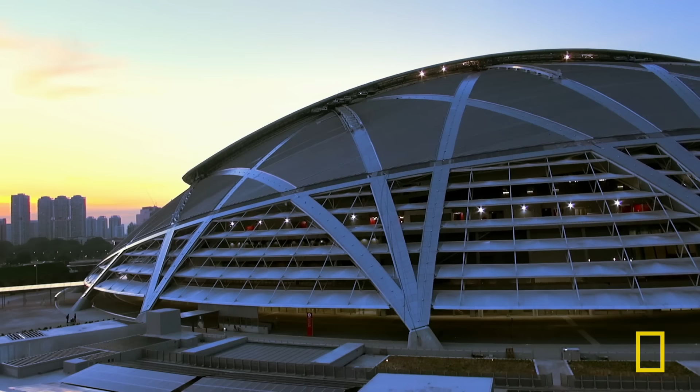Like no other, this enormous state-of-the-art building dominates the entire city that surrounds it. The Singapore National Stadium is a truly epic structure. It's simply, undeniably unique. You have this beacon of light coming off the top of it. The multi-award-winning sports arena is a dazzling symbol of Singapore's national pride. But more than that, it's architecture on a scale never previously achieved.

It's the largest free-spanning dome in the world. How on earth do you build a dome this big? It's a real marvel of structural engineering. When it opened in June 2014, the spectacular ceremony marked the end of a torturous battle against the laws of nature.

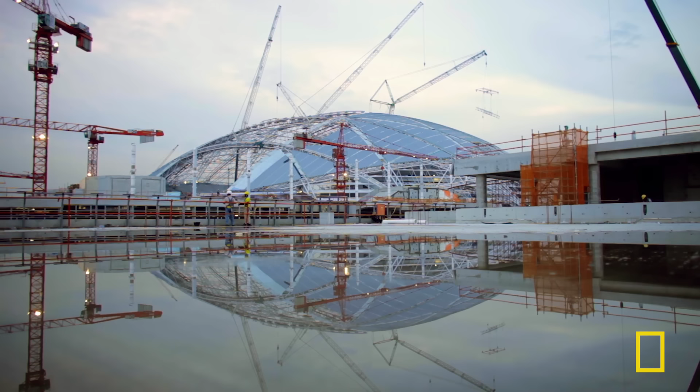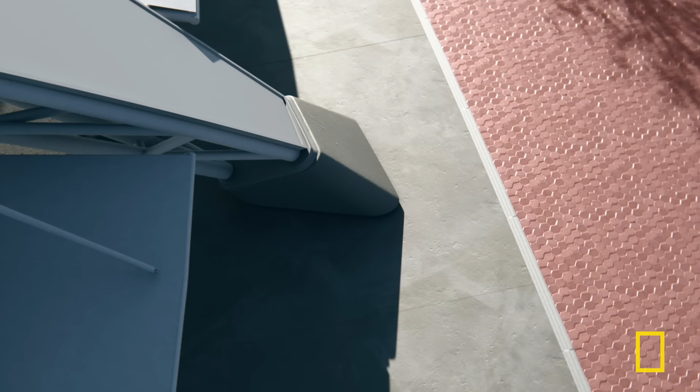Physics, as well as the climate, and even the land the stadium is built on, presented a deluge of horrendous hurdles that came close to defeating designers. Obviously, it's a major project with huge challenges along the way to making it and realising it. The only way to find out how architects and engineers won the battle to turn the stadium into a successful reality is to take it apart and reveal the innovations hidden within it.

The futuristic Singapore National Stadium is the centerpiece of a giant $1.3 billion sports hub. Dreamed up at the start of the millennium, the intention was to give the city-state a glossy new forward-looking image, with a stadium that could host prestigious international events.

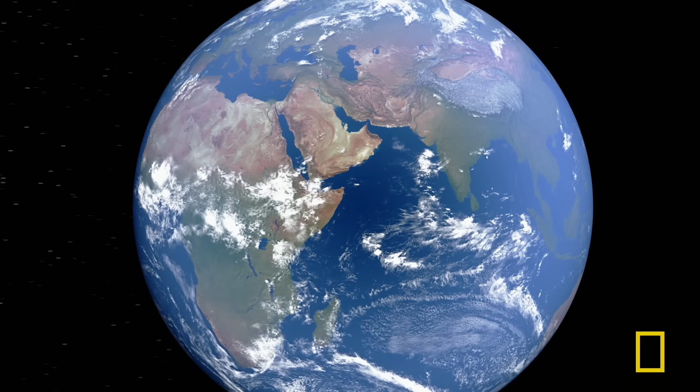Back in the year 2000, Singapore was really looking at transforming itself. It is a little red dot in the context of neighboring countries and this part of the world. We may be small, but the dreams and aspirations of Singapore are actually very bold, very big. Today, the stadium stands as a testament to those grand aspirations. The National Stadium is the largest free-spanning dome in the world, spanning over 1,000 feet.

The range of engineering disciplines that we were controlling was beyond anything I've done before in my career. Designing a venue that delivers a great experience to tens of thousands of people all at once is quite different to any other engineering challenge. And for architects, a stadium can be the most creative project of all.

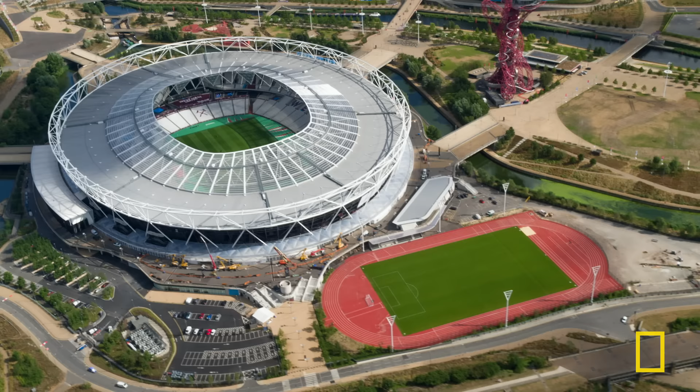This is incredibly hard to do. It requires a vast investment in technology to engineer that. And so you have to have the right kind of geological conditions and the right kind of infrastructure systems in place to support the building, both during its construction and during its lifetime.

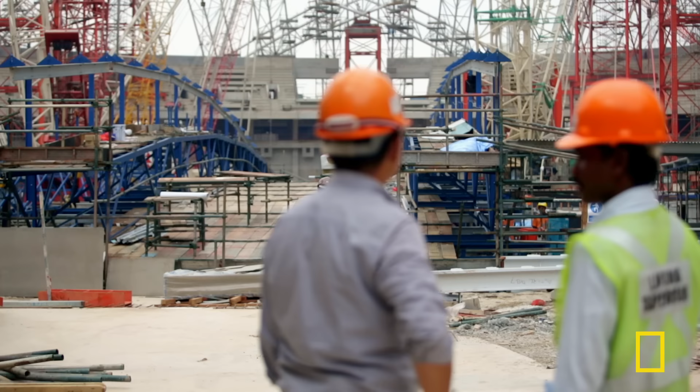All of these buildings are one-offs. You're not doing it as number 7 in a series of 10. These are each unique buildings with their own constraints and their own set of reasons for coming up with various aspects of the designs. The problems to overcome can be anything from crowd transportation to the sourcing of building materials. For the Singapore National Stadium, there is one issue that will never go away.

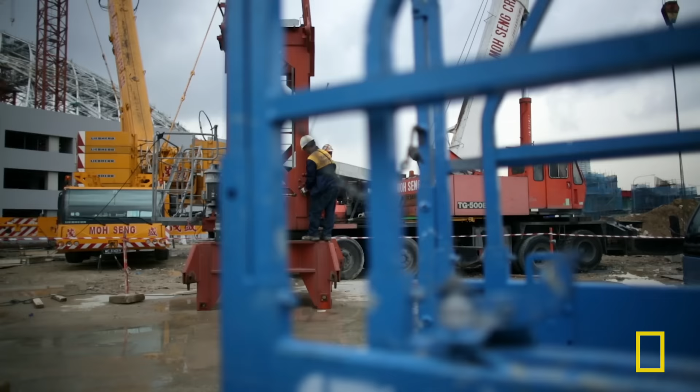We are located in a tropical zone where it doesn't just rain, it pours cats and dogs, right? In the 1970s, the first national stadium was built on the same site. But it was open air and completely useless against the elements. Right from the start, the brief for the new stadium insisted on a weatherproof roof. The architects could only come up with one solution.

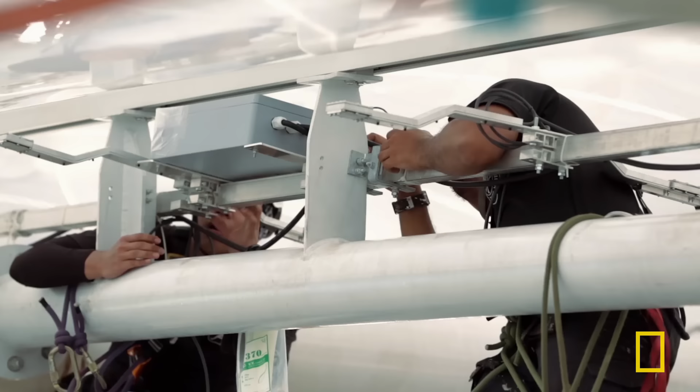It was radical and would be a huge and very public gamble because it had never been attempted on this scale until now. There's a huge amount of pressure, and you're always feeling that if it didn't work this time, then you didn't have an alternative. To build an actual structurally sound, solid roof over a stadium is a feat of engineering of some distinction. For starters, the area of a stadium roof is vast. And that means weight, lots of it.

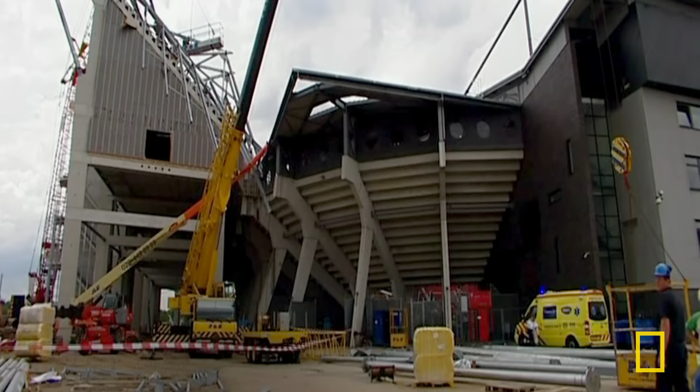Several stadium roofs have collapsed. You have to think about the obstacles you face whenever you enclose a stadium of any kind, which is how do you hold the roof up? And in most conventional stadiums, that was done with columns. Columns are very effective for supporting flat roofs. But any column system inside a stadium has a fundamental disadvantage.

In a large sporting arena, the starting point for the designer is the field of view of the spectator. They want to be able to see what's going on. You don't want a column interfering with the view of the fans sitting behind it of the action on the pitch. So how do you deal with that?

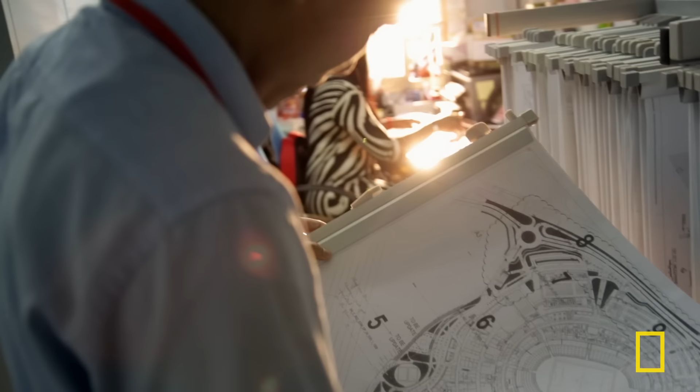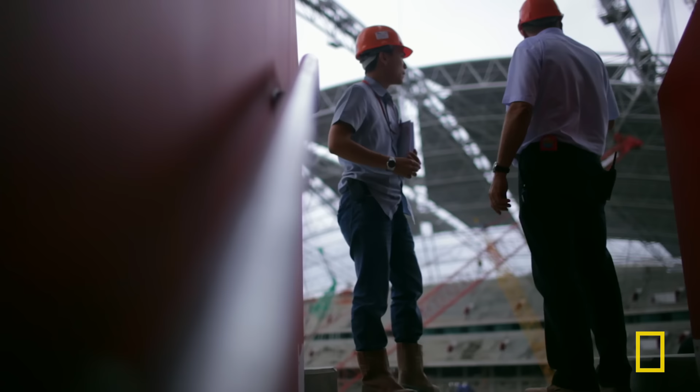For the new Singapore National Stadium, any design with columns is ruled out. But a roof is still a requirement, and it must be supported somehow. Architects delve into history for inspiration.

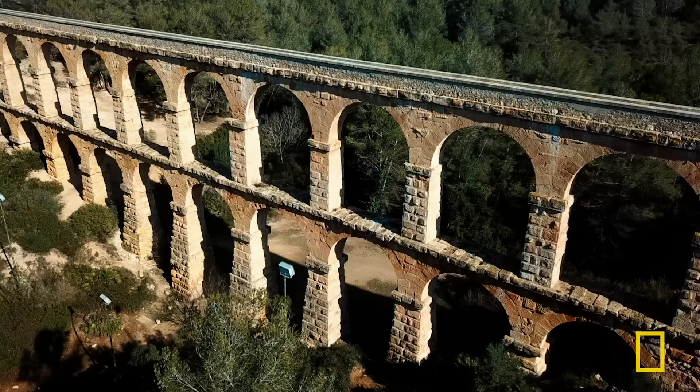Going back to sort of Roman bridges and the like, the arch has always been a very natural form for resisting uniform gravity loads. That's why they work well for bridges and even the natural arches that would form in rock. If you think about the arch, you've got this curved structure, and when you put a uniform weight on top of that arch, the arch basically channels all of that load into the bottom of the arch, but it keeps the entire structure in compression. So what that means is it's being squashed together.

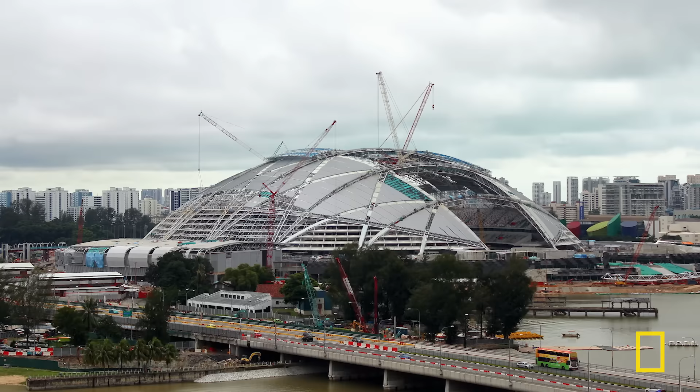You take an arch and just keep on rotating it, rotating it, rotating it, you get a dome. Not only is that efficient for resisting a uniform downward load, because it's a three-dimensional system, it actually has quite a lot of resistance to buckling out of shape. The architects choose a dome for the roof, but they go a step further and plan the entire structure to be contained in the dome.

As is the case with any building, scale matters. So sometimes when you do something that we know well, but you just do it a lot larger, the impact really is tremendous. But what about the weight problem that a roof of this scale inevitably poses? The stadium's first secret lies underneath its outer shell. There are no supporting walls. The whole building is basically a roof, a lightweight dome formed by a number of gigantic metal arches.

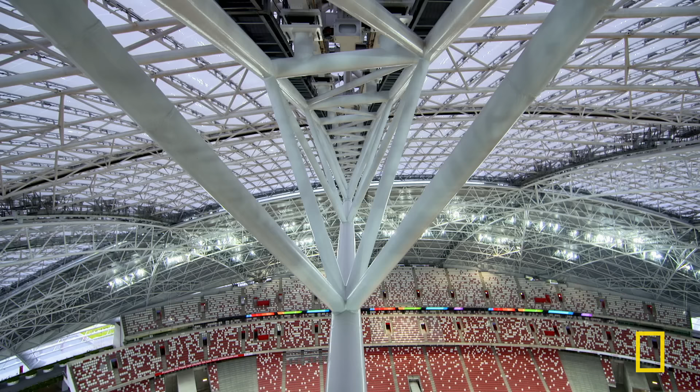6 steel trusses span from side to side, and at 90 degrees to them, there are giant transverse trusses. Together, they hold up the whole roof. Trusses with lattice structures are structural engineers' favorites because they've got triangles in them, and triangles are really, really stable shapes. They don't deform. So if you imagine that you had a rectangle shape, and if you put kind of funny forces onto it, it can deform into a diamond, but triangles just don't do that.

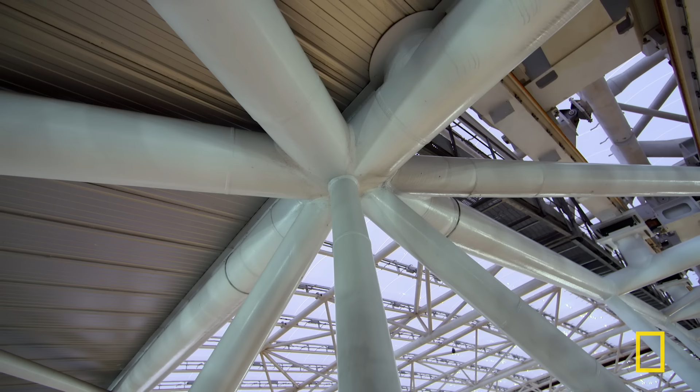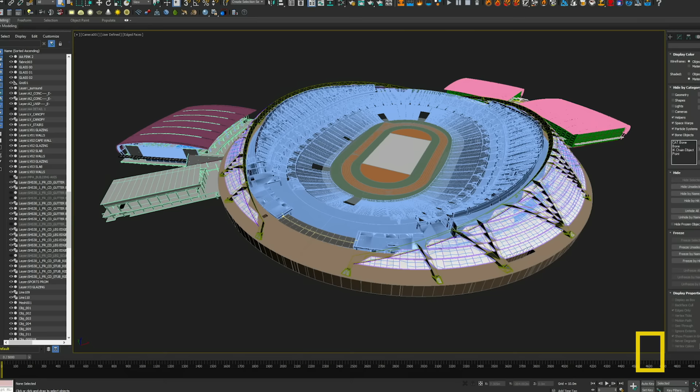There are over 11,000 tons of steel in this monumental structure. But in 2008, when the design team were still drawing up plans, the global financial crash takes its toll, and steel prices rise all too aptly, right through the roof. When we initially did the design of this, we had almost double the amount of steel that was in the roof. And then as steel prices escalated, there was a real drive to say, okay, how can we drive efficiency into this? To stop the project going way over budget, the team urgently needs a revised design.

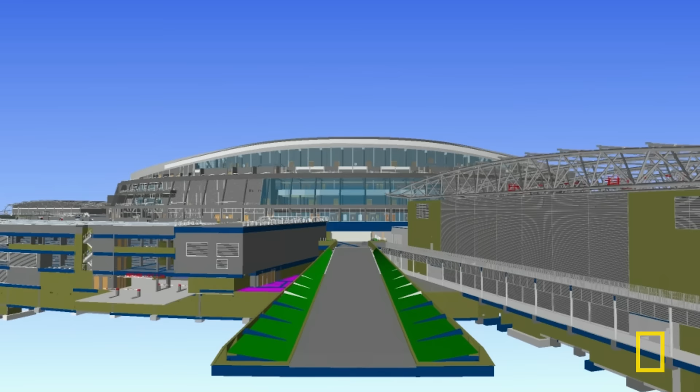Our design mantra was to reduce weight everywhere in the structure of that dome, so we got the best, most efficient shell structure. Everything had to be optimized to minimum weight to make that a very efficient dome. They create an innovative computer program that can work out the minimum amount of steel that would still meet the structural requirement. We developed a very bespoke piece of software to achieve optimization of every element within that roof structure, whether that was the thickness of the steel or the diameter of the tube. It was all optimized to make it the lightest steel structure possible.

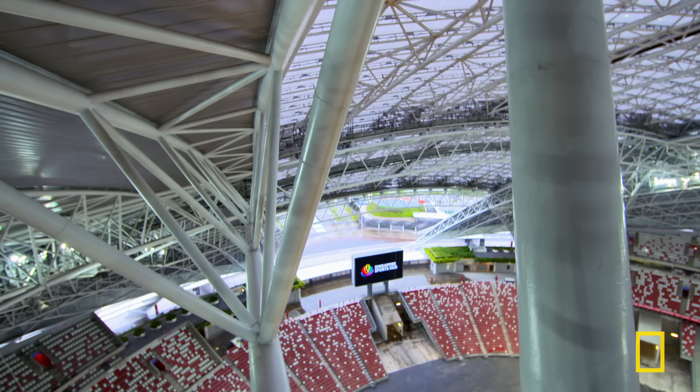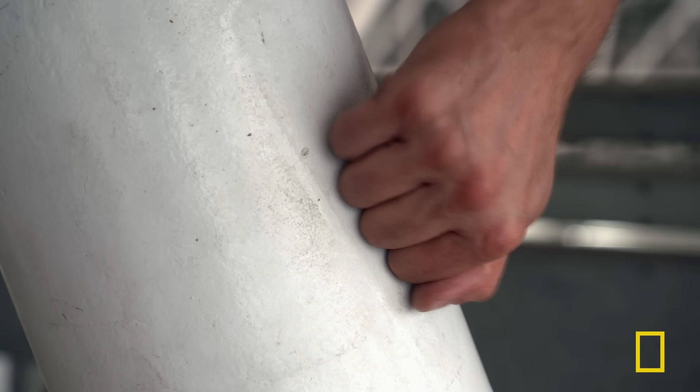20, 30 years ago, you just couldn't do that. It would take you years to do the sort of design that we've done here in a matter of months. The result is a world record-breaking dome that is so large the Sydney Opera House would fit inside it. All of the sections are hollow, so they're all hollow tubular sections. You make them as thin and as light as you can. You're up here and you're looking at it at various angles, and everything just looks right and it looks in balance, because everything is here for a reason.

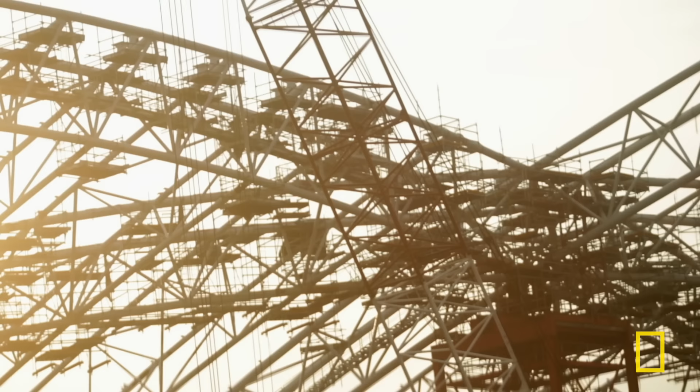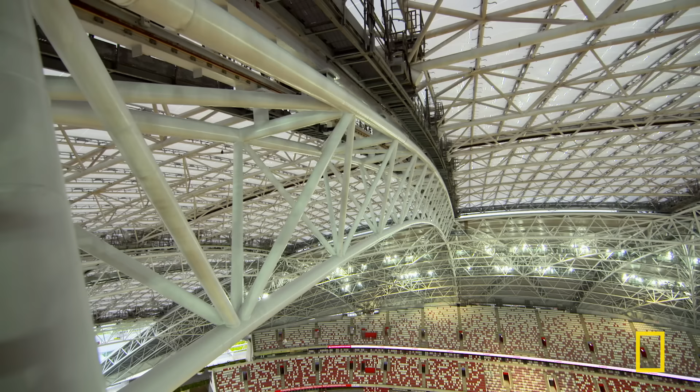Reducing the amount of steel cleverly saved the budget going bust before construction had even started. If you took all of the steel in the roof and you melted it down and laid it down on the footprint of the building, you'd only have 15 millimeters of steel. The structure that makes it up looks really light and elegant and slender. So I think it's a real marvel of structural engineering. One challenge down, but the roof design is just the start. Making it hold its own weight is one thing. Firmly attaching it to the ground is quite another.

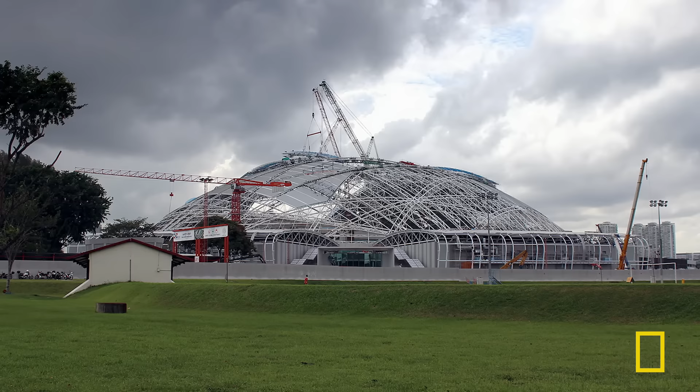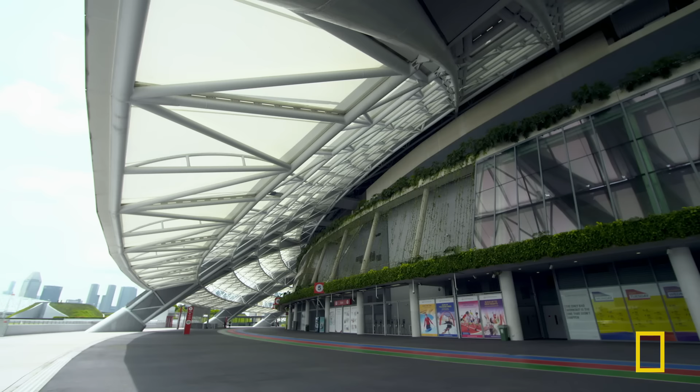When the high-tech Singapore National Stadium was built, the construction team faced a serious problem. The local terrain was completely unsuitable for erecting a large, heavy building. Because it's reclaimed land, directly underneath the grass and the topsoil here, we have a lot of what's called marine clay, and marine clay is about as useful as dark grey toothpaste to build a building on. It really is just muck. If you were coming down onto rock, the force from a dome could go directly into the rock. We don't have that advantage here.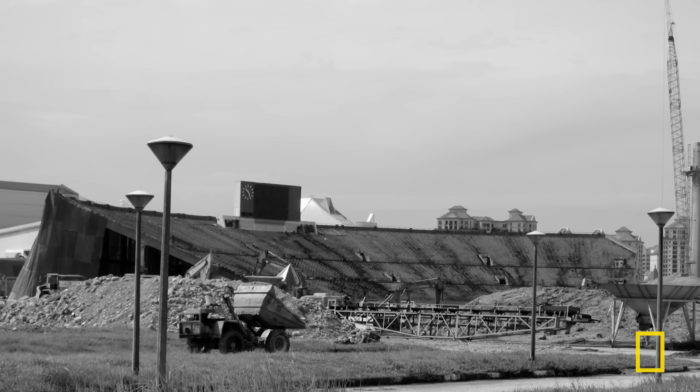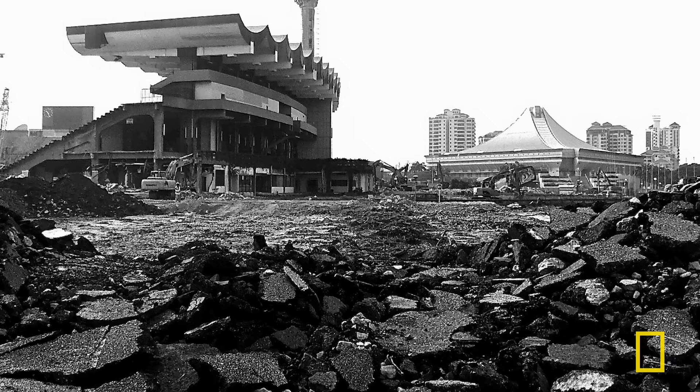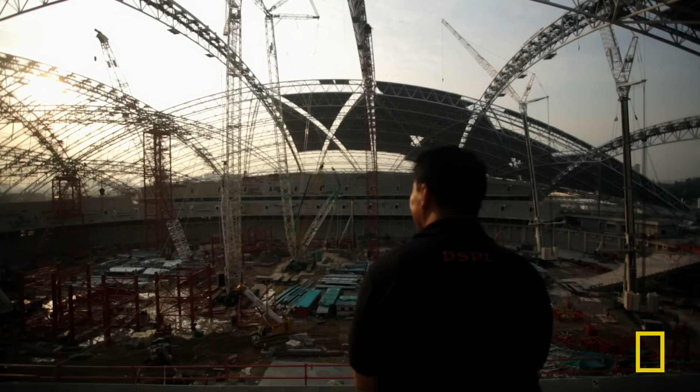The poor ground threatened the whole project, but there was a clever solution right in front of them. We started with the demolition of the old stadium here in late 2010. The old stadium was crushed up. All of the concrete was used as either a base or some parts of the ground forming for landscape. And on top of that debris, a rock-solid base of concrete. The Singapore Stadium is built off what is called a raft foundation. Now that is a large concrete slab over the ground.

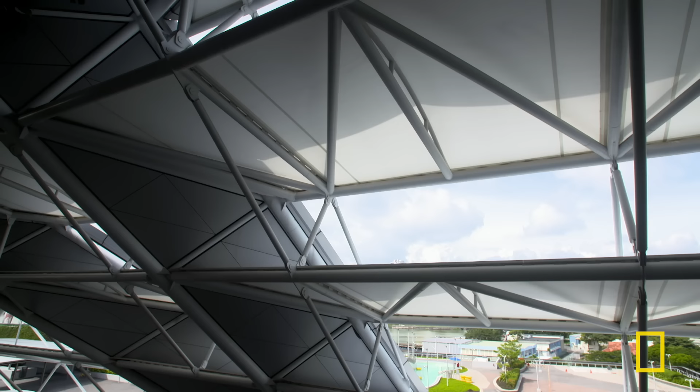Unfortunately, the raft foundation alone is not enough. The dome's weight pushes out as well as down. It would collapse into a giant pancake unless something holds it in. Once again, the engineers look to historic masters for inspiration.

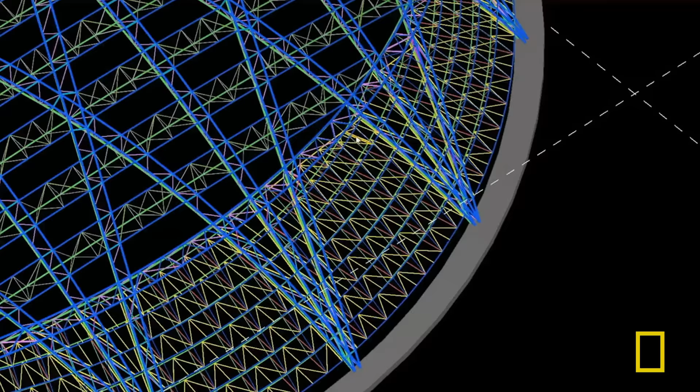In historic domes, like Florence Cathedral or St. Paul's, is a chain, a metal chain. So you put a metal chain around the edges, so where all the weight of the dome comes down and is trying to pull out, it's restrained. Engineers stole that Renaissance concept and came up with what's known as a ring beam. Instead of using a chain above ground, they buried it in the foundations.

In the Singapore Stadium, the dome is restrained at the edge by steelwork that must be completely continuous, as if it were a chain, to stop the dome pushing out. It relies upon being one structure with complete undamaged integrity.

So what I'm standing on the edge of at the moment is the ring beam, and it contains 14 ducts of very high-strength steel cables. And those cables, the amount of force that we put in those, we pre-stress them, is around 4,000 tons. So it's a huge amount of force. The ring beam is like a large, very strong elastic band that's pulling it back in so that all those legs don't spread. Most critical is where the huge trusses meet the ring beam. A single error here, and the trusses would explode out.

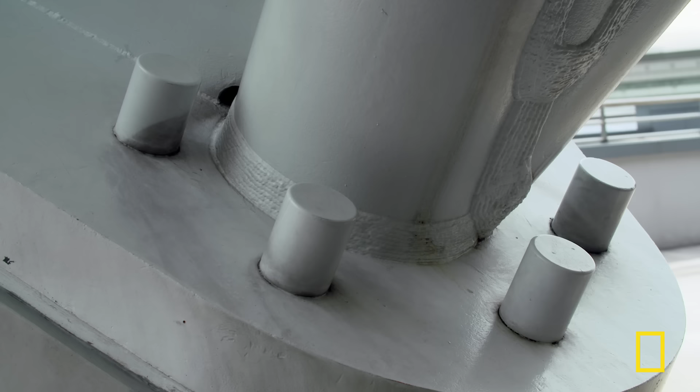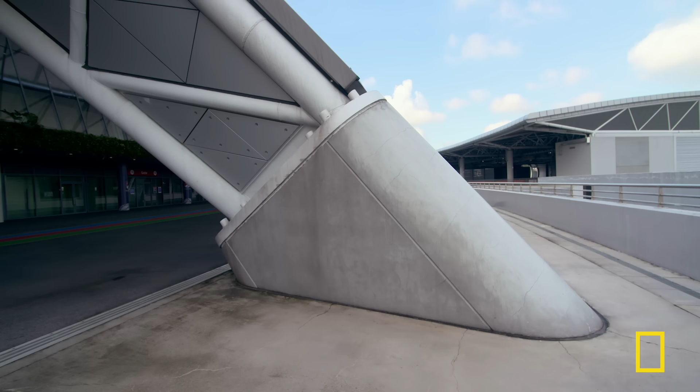So these are some of the most complex and nerve-wracking parts of the project to construct, and we call them the thrust blocks. So the entire roof, which is 9,000 tons of steel and around 15,000 tons total weight, comes down on only 20 of these supports. So you can imagine how hard they're working. The weight of the whole structure is directed down onto these huge thrust blocks. The only way to understand how they're locked onto the ring beam is to look inside one of them.

Hidden within the giant concrete block is the secret. 175 metal rods called shear keys penetrate right into the heart of the ring beam, their length and diameter perfectly calculated to be just enough to completely secure the truss. Bringing this down just to get 175 shear keys to sit inside that reinforced mat was one of the most challenging elements of the whole job. The next aspect of the project is where the real headaches start.

The pitch is made of live grass, which leads to another complex engineering problem. The enormous roof has to open and close. The moving roof did pose challenges for us. Quite commonly they're done on a flatter roof profile, and they're very linear in their opening and closing arrangement. Doing it on a sphere created some real challenges for us. The movable sections each cover 100,000 square feet. And because they're curved, getting them to move at all is a mechanic's nightmare.

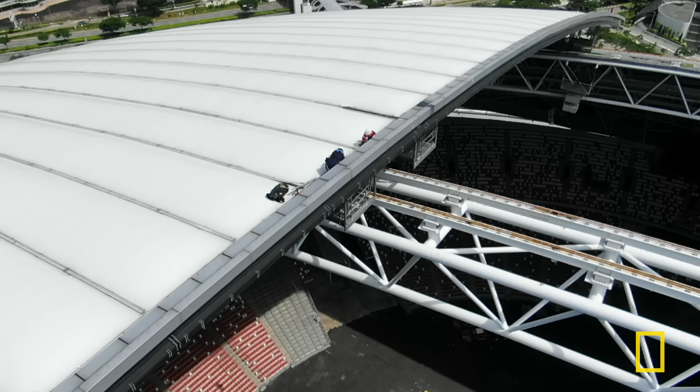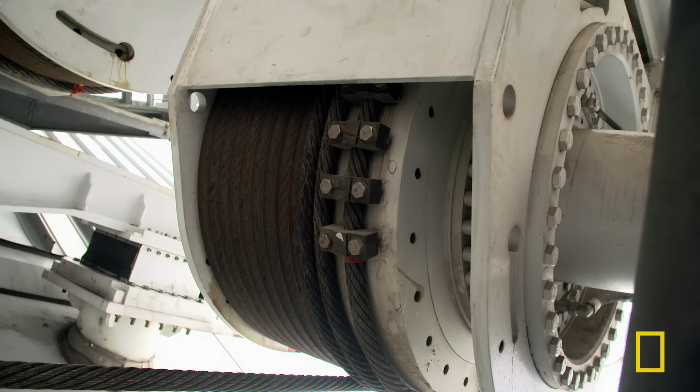The retractable roof is around 1,000 tonnes per leaf. There's 2 leaves that open and close, so the roof had to be very strong and very stable. The design was for the movable leaves to run on rails. But there was a dilemma. Any expansion or contraction of the metal components could make the panels jam. So they couldn't be too rigid.

We worked out very early that we should have a very stiff fixed roof, but then kind of a floppy retractable roof that could kind of bend and move a little bit. The solution that engineers ended up using was an incredibly efficient winch system, with winches mounted on that retractable roof to reduce the amount of cable that was required.

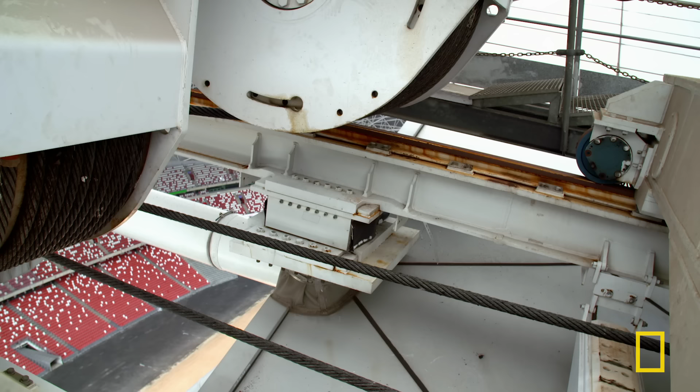When you are winching in, it pulls the roof upwards to close. When we are lowering the roof, the majority of the work is done by sheer gravity. The roof panels are mounted on rails attached to the arch trusses. Powerful winches on the base of each panel heave them up to close the roof, and the cables take the strain when it opens.

But here's where it's really smart. Sensors monitor exactly where the panels are, preventing them from ever skewing more than 1.5 inches. And to reduce friction, the number of wheels in the system is kept to a minimum. If we reduce the number of points that it actually hangs from, or the driving points, then that also reduced the possibility of the whole thing jamming.

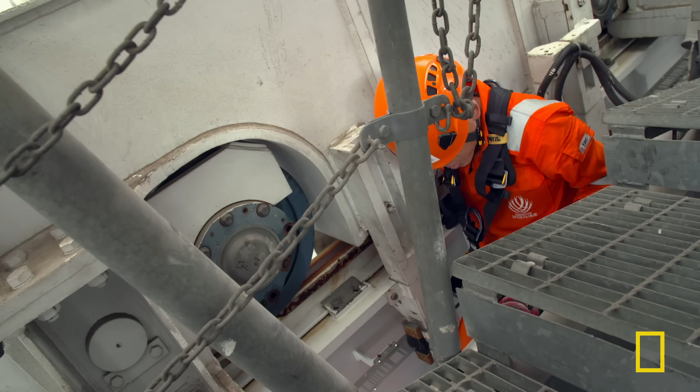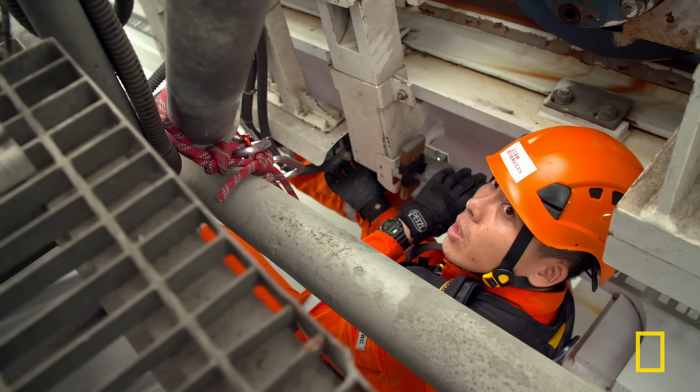This silver-looking strip is like a barcode, and the position sensor actually reads off this silver strip to inform back to the event control room where the control system is at on the position of the roof at any one point of time. So this is tracked very closely. And one fun fact is that it's so sensitive that even a drop of water would actually cause the entire system to stop.

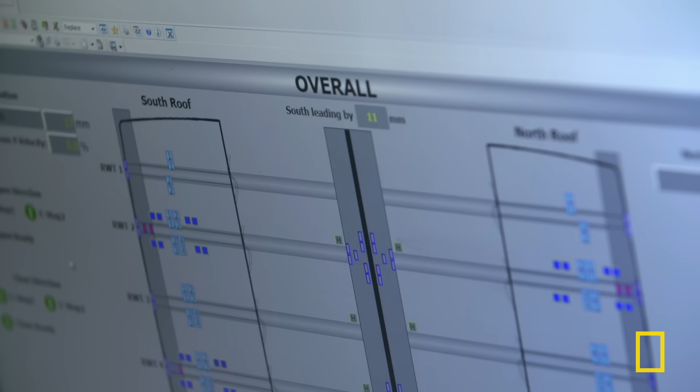The retractable roof is a key feature of the stadium. Incredibly, it can open or close in just 20 minutes, thanks largely to lightweight inflatable pillows of plastic called ETFE, which make up its skin. Basically, all aspects of the roof movement are actually controlled here from the event control room. We've already done our last checks. Mission control is good to go, and we hit the button.

Operating such a huge structure, it's better to have as few heavy elements as possible. One primary reason why it needs to be inflated is to allow water to run off, so that it's not a flat surface. If it's flat, water can collect, or if it's sagging, water can collect.

Today, the maintenance team are out, using a drone. We're actually flying above and outside of the stadium because we actually get to go to places where even the rope access technicians would have great difficulty getting to. So over there, we are actually able to scan the entire outer shell, outer dome of the stadium itself.

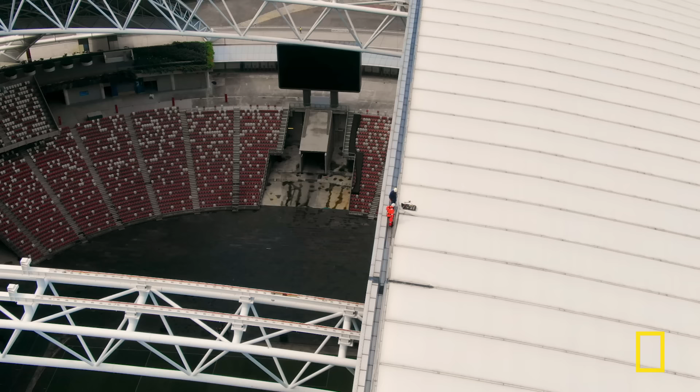If you're in the tropics or you're equatorial like we are here in Singapore, and you're coastal, then you have salt in the air, you have a hot, humid environment, things rust very, very quickly. So with the drone, we're actually able to go up there, start to inspect for things, see whether, for example, are there any abnormal rust streaks coming down from the roof? Are there any panels that look misaligned? Is there anything that really looks out of the norm?

On occasion, when the pitch is in, we actually use it to monitor the quality of the pitch and to actually see how well the grass is growing on a frequent basis. Keeping a vigilant eye on the state of the turf is vital for any venue that holds world-class soccer, rugby, or cricket events. But for the Singapore Stadium, it's now especially important, because soon after the pitch was planted, there was a disaster. Unfortunately, there just wasn't enough light getting into the stadium, and the grass, it died.

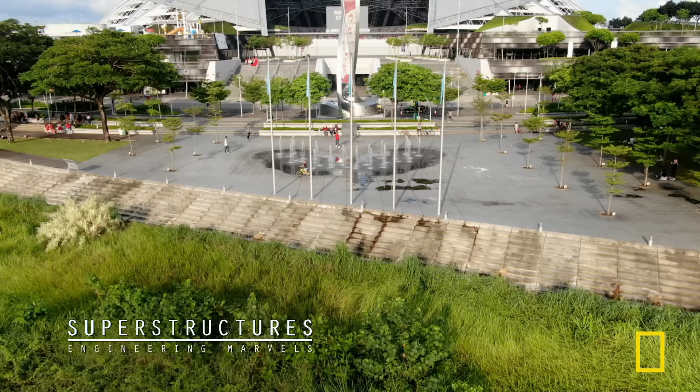The Singapore National Stadium is one of the most high-tech sporting arenas in the world. But when it opened, it had serious teething problems with one vital component: the turf. In any sports stadium, the pitch will be the crown jewel, because this is where all the football action, rugby action, all those events or activities happen here, and you have a full house of 50,000 people watching. So I would say the pitch would be most important.

One of the huge challenges building a stadium like this is that you've got a living thing at its centre, this huge lawn that's got to be kept in absolutely tip-top condition for international sporting events. Because we are located in a tropical zone, because we have a retractable roof, it is not so simple to just grow grass in this climate. So the 5 key elements of growing grass: you need light, water, temperature, air, and of course nutrients. So to keep this grass healthy, these 5 elements are important. In a dome where we have shade and all that, first of all, the light is compromised.

When the stadium opened, disaster struck. At the centre, the crowning glory of this stadium is its beautiful, flat, international quality grass pitch. But unfortunately, there just wasn't enough light getting into the stadium, and the grass, it died. More than an embarrassment, the withered grass threatens the fundamental viability of the stadium. Detractors call it a white elephant, a colossal waste of money. Footballers like Carlos Tevez are prevented from playing on the substandard turf.

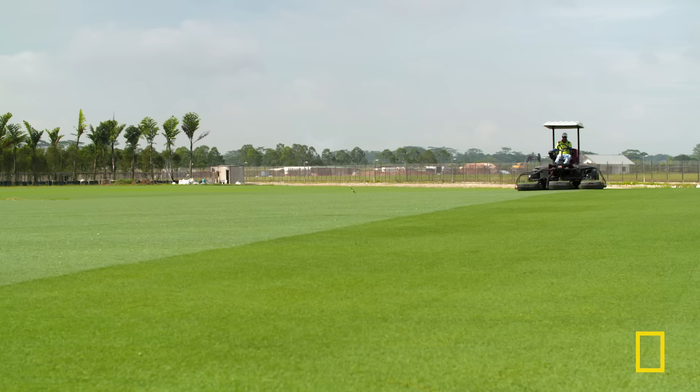When it got to the point that managers weren't allowing their star players onto the pitch for fear that the terrible sandy condition of it would cause them injuries, something had to be done. Initial days, we used the stadium grow lights to enhance the exposure of light. This problem with the grass was so fundamental that they tried everything to solve it. And they spent a phenomenal amount of money trying to just blast this grass with artificial light to help it grow. But the light isn't the problem. The grass still stubbornly refuses to grow properly. Desperate for a solution, they take a major gamble and commission a brand new type of turf.

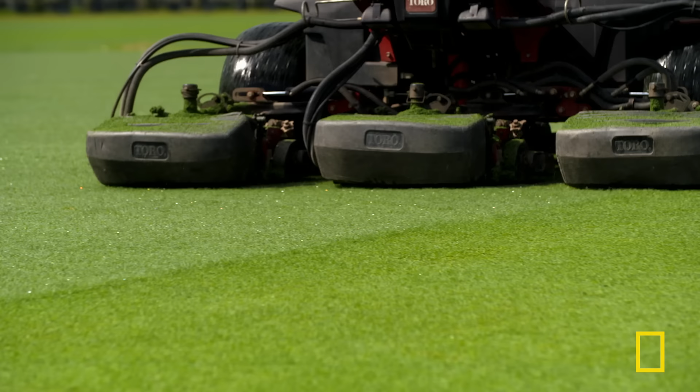We are now currently at the nursery where I grow all my grass, my pitches. And this is where I do all the work, the start of the journey, before all the grass rolls get all rolled up and go into the National Stadium for events. At an off-site location away from the stadium, Jonathan and his team of horticulturalists experiment with different types of grass.

To some point, my family actually finds it quite queer and sometimes funny what I do. I get out very early in the morning and I come back when the sun is setting, and they do wonder what I do until I take them to the park and I explain to them the different grass types and how they are maintained, and they go, wow.

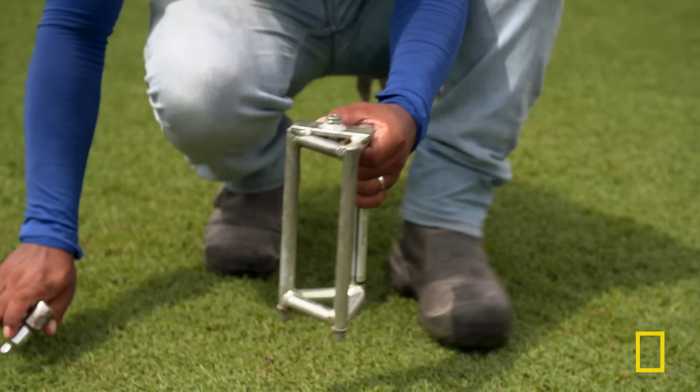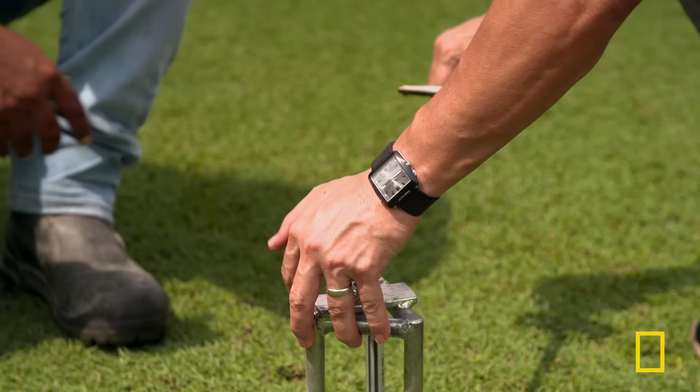We are doing a traction test here, and this is a portable traction tool. And as it rotates, we have a reading on the wrench here, and the time when we stop is when we hear the grass almost tearing, and we look at the reading from here. So a good traction will be about 40. So this is what we're trying to achieve, get it ready for the National Stadium.

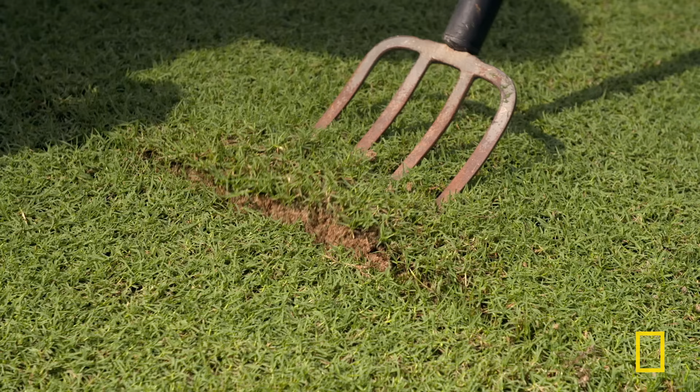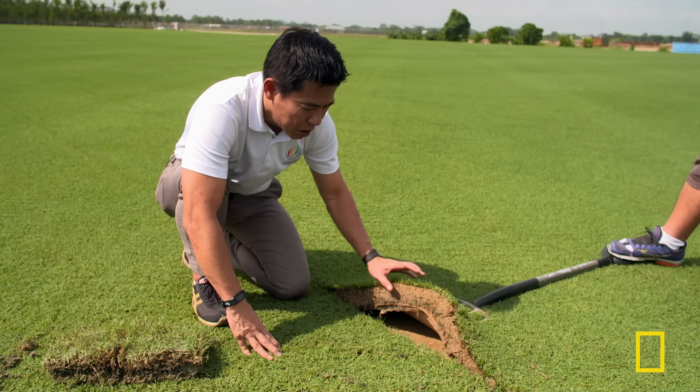Eventually, they choose a brand new hybrid turf that is part real grass and part synthetic fiber. This is the section of the turf rolls of the hybrid system. It's reinforced turf. As you can see, there's some fibers that's intertwined with the turf grass. Of course, the grass matters a lot as well. It's just a combination of both. That's why it's a hybrid.

The big advantage of the nursery is that spare pitches can be grown here and transported to the stadium whenever they're needed. The hybrid turf has 7% synthetic fibers mixed in with live grass to give the cutting-edge playing surface consistence. A layer of high-grade sand aids traction, but it's a special woven backing that holds both roots and fibers together. A network of subsoil pipes supplies the pitch with water.

The irrigation system is fully automated. I have a computer system in the office where I can do my work and control it, or I can have a remote to control it, as well as an app on my mobile phone that I can control it while I'm having breakfast. Yeah.

In the past 1 year, it's been very positive. We get definitely a sense of satisfaction of saying, okay, this strategy is working, it's coming along. But then again, there's never a complacency because we are dealing with a natural product here.

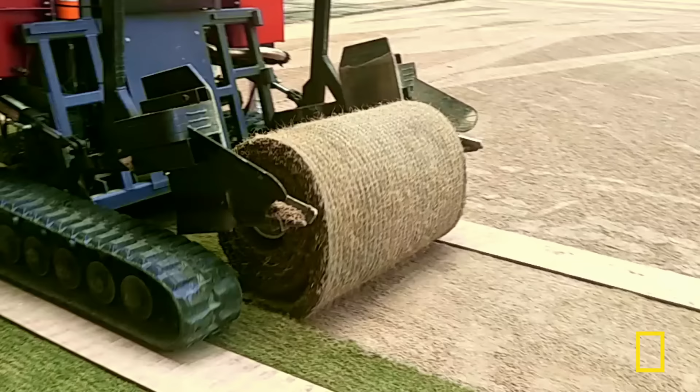The removable pitch is known as a lay-and-play surface. And for the Singapore Stadium, it offers up an added bonus. We are pretty much a multi-events calendar where we got sporting, we got community events. So because of this, the lay-and-play solution was approached, and it works out very well for us. They can change the pitch in just 48 hours.

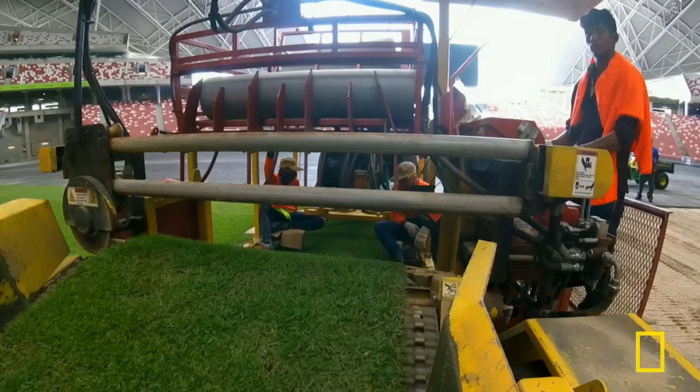But whatever the event, there's one issue that always needs addressing: how to prevent spectators sweltering in Singapore's super hot temperatures. Singapore lies just 1 degree north of the equator, its tropical climate unforgiving. Humidity is consistently over 70%, and the temperature often soars well over 80 degrees Fahrenheit.

To avoid the spectator experience being compromised by the extreme heat, the National Stadium's engineers must provide cooling on an enormous scale. Imagine the biggest room in your house. We're talking about something thousands of times larger. You know how hard it is to heat and cool that room. Imagine trying to do it at a stadium of this scale.

Quite clearly, you can't condition the air from the top and blow it down, because it will just heat up again. One of the essentials about any form of heating or chilling, you don't want to heat or chill a space, you want to heat or chill people. Rather than air conditioning the whole enormous volume of the stadium, what the engineers came up with was a per-seat addressable system. Remarkably, cooled air is blown individually to every member of the crowd from below.

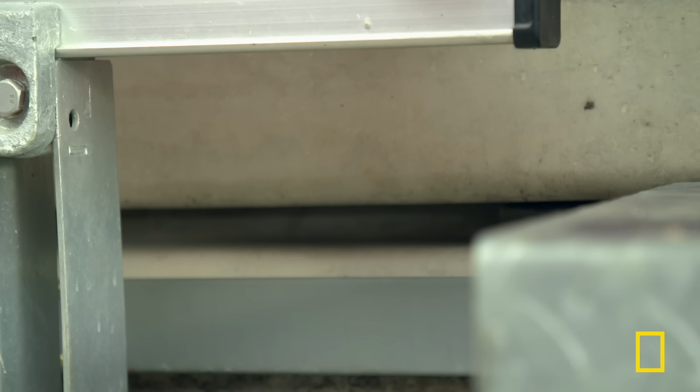So using the concept that hot air rises and cold air sinks, we are able to keep the cool air in the stadium by pushing through the seat outlets and downwards to all the audience. Okay, if you put your hand here, you can actually feel the cool air coming out from the seats. It's a brilliant idea, but the ducted air still needs to be cooled somewhere.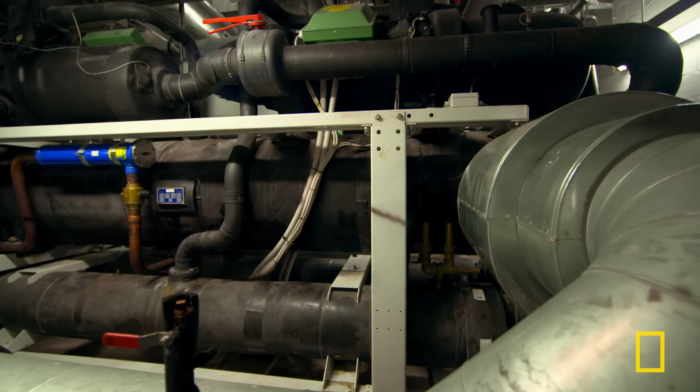We have 116 air handling units located at the back of house that provide cool air to all individual seats in the stadium. Warm air from the atmosphere draws into these giant heat exchangers, where it meets cold water. Behind me are the chiller plant rooms producing chilled water. And once this chilled water leaves the plant room, it travels through the pipes to the individual AHUs, air handling units, so-called. The challenge here is how to produce very large quantities of cold water on demand.

So one of the solutions they've come up with is to use loads and loads of balls of glycol, so basically antifreeze, which you cool down to a very low temperature before a game, and that means that you can use them to store up all that cold in readiness for the big event.

Glycol works like the ice packs we put in the freezer. It retains cold. Night before a big match, they'll cool down the glycol, which in turn can cool down the water, and then this water will cool down the warm and humid air, which is then circulated out into the stadium. Once the cooling is achieved, the water simply recirculates through the system.

When the Singapore National Stadium was conceived, one of the most demanding directives was that it should be a multiple function area. Like no other stadium on Earth, it must host soccer, rugby, cricket, and athletics, as well as rock concerts. Each kind of event needs a different sized area. But for all of them, spectators need to be as close to the action as possible.

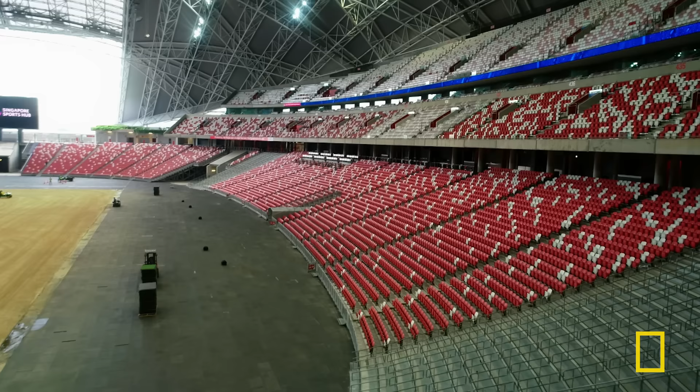The only way to make sure people are right at the forefront of the action in loads of events with very different configurations is to allow the seating stands themselves to move. The first thing that happens is that middle tier retracts downwards, and then the front tier of seats can move back, covering those up and making a bigger space in the middle of the stadium.

There's 30,000 seats that move. In athletics mode, they drop down to the ground and they're tucked under the retracted seats. And there's about 5,000 seats that appear in football mode. The tiers weigh up to 1,500 tons each. So this is an incredible feat of engineering.

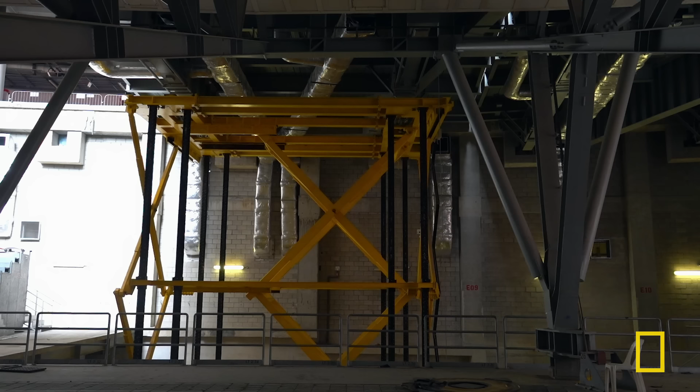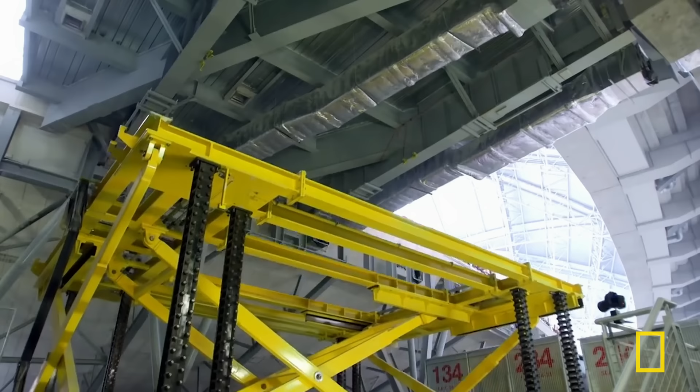Hidden underneath the seating bowl is a state-of-the-art lift system. That's called a Serapid machine. It's a chain-driven machine that crawls around in a trench. With the help of this machine beneath the tiers, the stadium's capacity transforms from 50,000 to 55,000. And for both configurations, designers have maximized the spectator experience by scientifically designing the acoustics.

In public arenas, spectators demand excitement. They want a high-volume assault on their senses. It's always about creating the unforgettable experience for spectators. In the Singapore National Stadium, we've achieved something really special in terms of atmosphere. An important aspect of that experience comes from the stadium's acoustics.

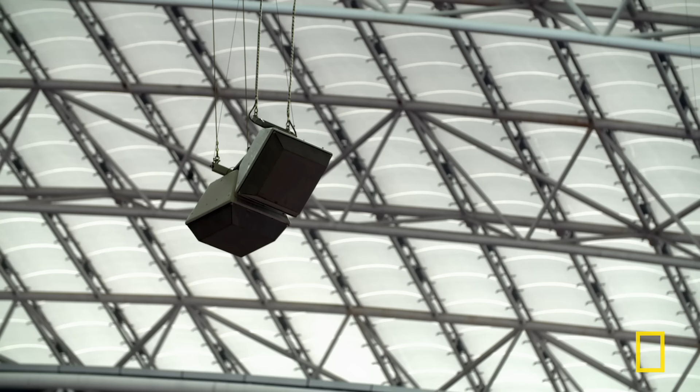You want it to be noisy. If you're cheering on the Reds, you want to hear everybody else cheer on the Reds, and the louder the noise, the better. Acoustics are incredibly challenging because you're dealing with different types of events. So you're dealing with concerts, you're dealing with soccer events, you're dealing with different capacities within the venue, so you have to design for absorption on people being in the bowl or how the sound will be reinforced within that atmosphere. Here in Singapore, sound engineers applied rigorous science to the choice of materials for the roof.

Anything that would absorb sound, like soft curtaining, was rejected. You want to hear that crowd magnified, amplified. And so in the Singapore Stadium, they've got loads and loads of highly sound reflective surfaces that bounce that sound back at all angles to try and make everything sound as loud and intense and vibrant as possible. It's very important to have the lower part of the roof be reflective, which can reinforce this excitement generated from the crowds.

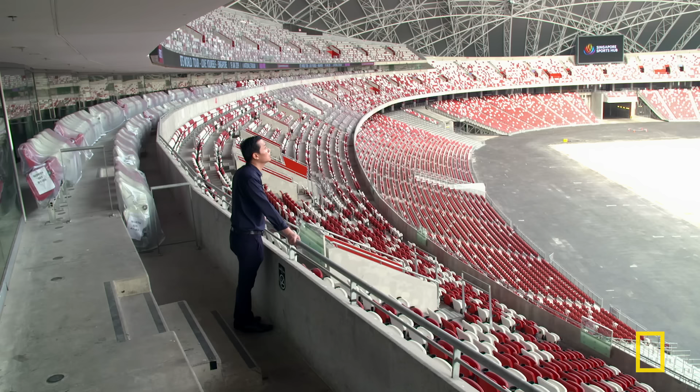Today, Jingfeng is running a test to determine if those reflective metal and plastic surfaces are still performing as intended throughout the stadium. We're going to play a special test sound to check the frequency distribution at each receiver location, as well as how evenly the sound level is across the stadium. The special sound we're going to play is pink noise, which is a flat sound across the overall spectrum.

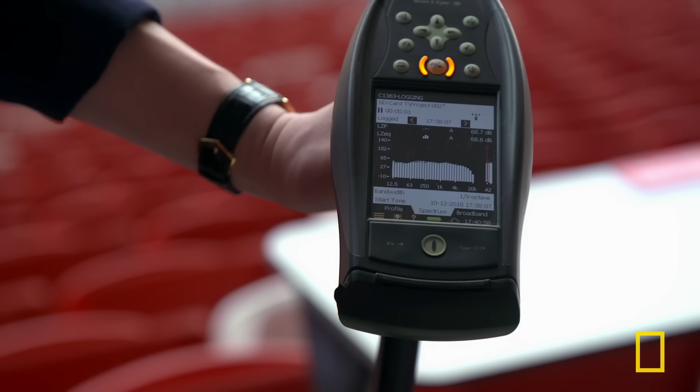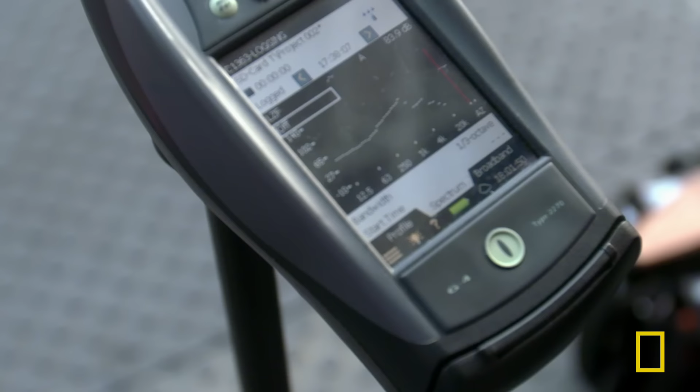Pink noise is sound that's evenly spread between low and high frequencies. If the monitor shows a flat response, it means the space is reflecting all frequencies equally. Any drop-off shows that frequency is being absorbed. The results are all pretty flat. Good news.

When a stadium is at full capacity, it is particularly vulnerable. And that means crowd management has to be at the very center of every design decision. And when the game's done, everyone's out. And so it's 55,000 people who want to leave now. Modelling that so that you understand how people can do that comfortably and leave and get to the various transport facilities within a reasonable time frame, comfortably and safely, is absolutely critical.

The price paid when things go wrong is the heaviest imaginable. In a stadium, when it's full, you've got tens of thousands of people all in there at the same time. And we know that we've had some really devastating disasters in the past, whether it's Hillsborough or Heysel. At both tragedies, critical errors compounded and people were crushed to death. And if fire takes hold at a stadium with poor exit planning, the results can be equally shocking. And we saw that to our cost at the Bradford Stadium, where there was a terrible disaster about not being able to get people out.

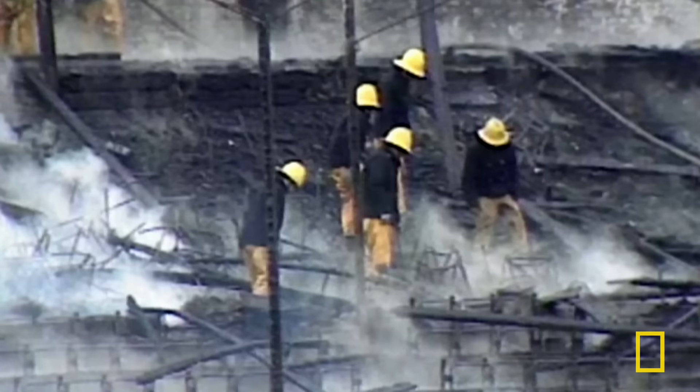Fires in these sorts of facilities are very, very rare, but the history in the UK has shown that they can occur, and understanding how people will react and making sure that they can react and they can leave safely in a very short period of time is critical as well.

We've designed the building so that the typical scenario is evacuation in terms of a fire or something which requires an immediate local response. And for that, we have an 8-minute time frame in which we're allowed to take people from their seat to a point outside of the stadium. Planning how 55,000 people can quickly evacuate the stadium is a task where the architects couldn't afford to make a single mistake.

A life-threatening emergency at a crowded stadium is one of the greatest fears for any architect. So it's absolutely imperative that the design of the structure and everything that goes around it is really spot on to make sure that we don't have any devastating consequences from it.

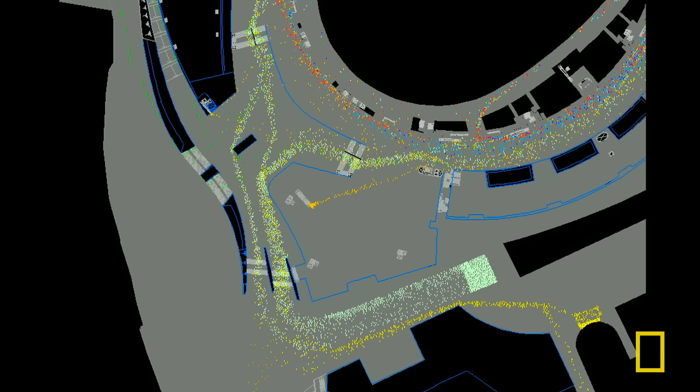Singapore Stadium's engineers used computers to analyze crowd behavior and help them plan entrances and exits. These things are amazing to watch because you watch where people crowd and where they congregate and where you're getting too many people, where are the pressure points. And it's really important to find where that's going to occur and then change the design before you've built it.

Part of the design of stadiums is around ensuring that every exit, as you sequentially go to the outside of the building, is getting wider, so you're sequentially able to flow unimpeded at a faster rate out of the building. And a lot of that required us to make changes to the design because some of the widths, even 10-metre widths, were required to increase to 12-metre widths to allow for counterflow of people under the cover of that canopy.

The status of any stadium is defined by the prestige of the events it holds. One of the most impressive staged at the Singapore National Stadium was the 2015 Southeast Asian Games. That was a very successful event, and it really showcased how the stadium can be best used for those sorts of events. That was something where the people of Singapore came and really, I think, felt a wonderful atmosphere in here, and it's their city on display to the world.

But in this day and age, even a world-class event is not enough to draw attention. Increasingly, stadiums are urban projects that help give identity to cities, and so therefore you want them to be prominent in the skyline and prominent in the cityscape. So for me, the most impressive thing about the Singapore National Stadium is those plastic cushions at the top that light up and just give the building a huge amount of personality.